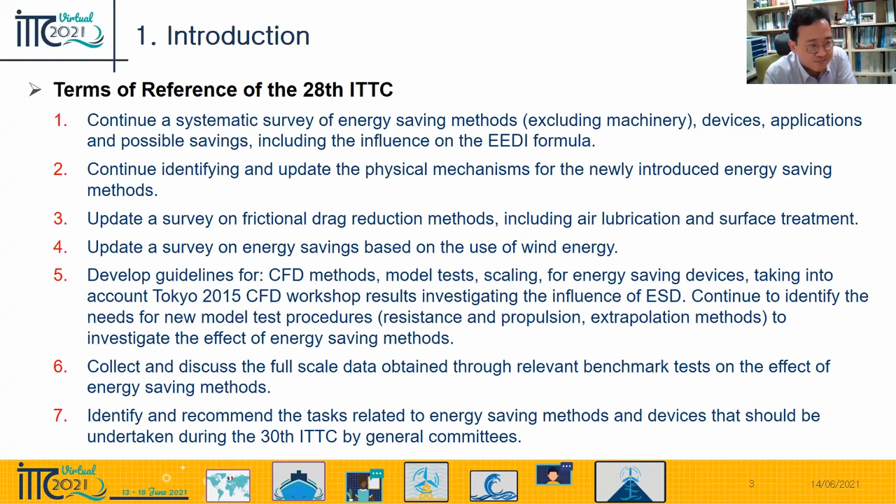Let me move on to chapter 2 regarding the survey of energy saving methods. In this shortened presentation, I'd like to make general remarks by showing the category of ESMs listed on the right. This category was established in the previous term and remains essentially unchanged. The primary category is about the principle, meaning where the energy saving comes from. There are 4 primary categories: direct reduction, reducing propulsive losses, use of renewable energy, and operation, shown in the next slides. Each primary category is subdivided into specific mechanisms for how the energy saving principle is achieved. During the present term, the committee searched for new mechanisms, so a couple of modifications have been made for the gate rudder and ducted CRP.

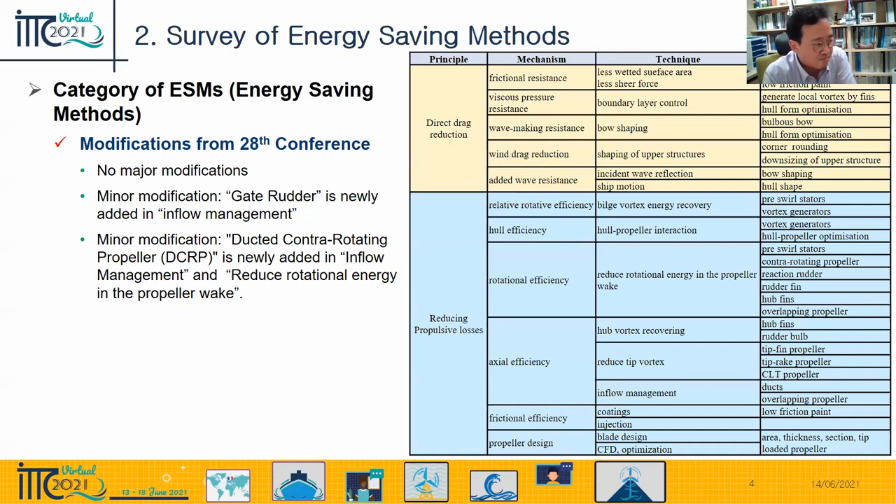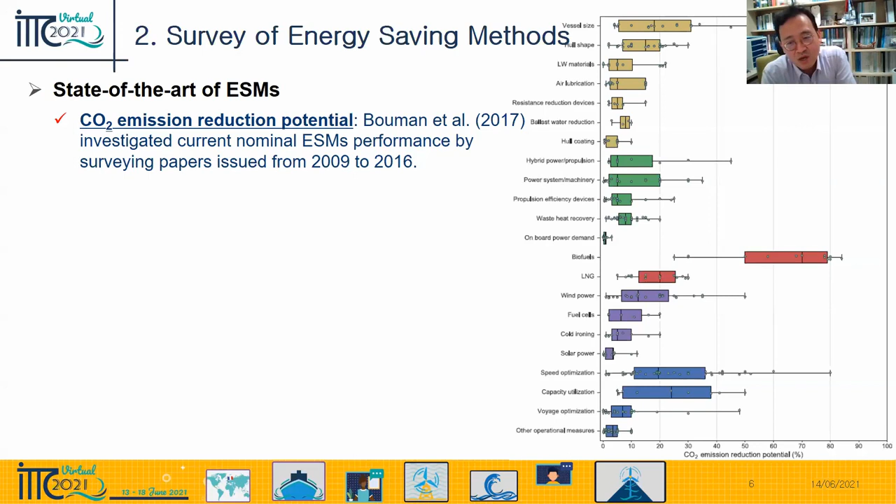This is the continued part for the category of energy saving methods, and another general summary for the energy saving methods. This figure was taken from Bouman et al. in 2017, showing the performance of energy saving methods in terms of carbon dioxide reduction potential, published from 2009 to 2016. In this paper, the ESMs are categorized into 5 groups: hull design, power and propulsive system, alternative fuels, alternative energy source, and operation. I believe this gives a good insight into the potential of the energy saving techniques.

Let's move on to chapter 3, titled Use of Wind Energy. According to Parker, there are several types of wind energy systems: flettner rotors, kites or spinnakers, soft sails, wing sails, and wind turbines. Smith et al. in 2016 stated that wind propulsion is most effective at slower speeds, for instance less than 16 knots, and for smaller ships with dead weights ranging from 3,000 to 10,000 tons. Those vessels account for 1/5 of global cargo ships.

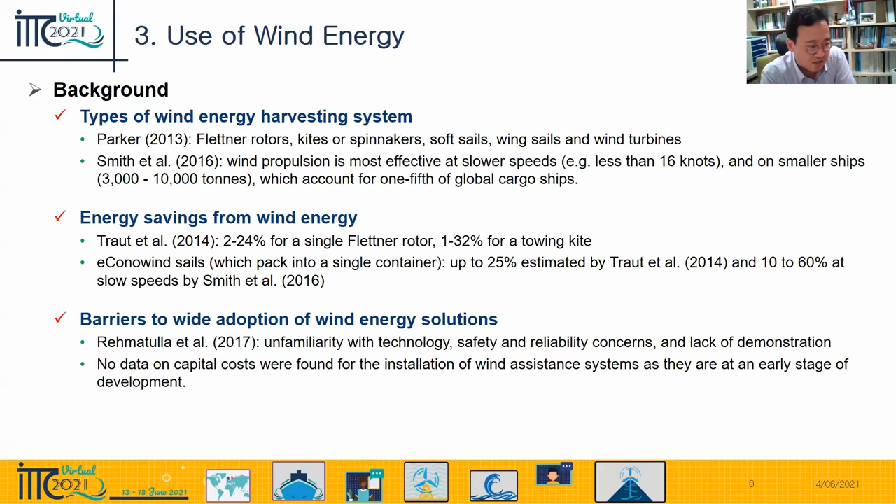The next slide lists representative types of wind energy systems and their energy saving effect. The first is the wing sail, investigated by Viola et al. in 2015, shown to reduce thrust by up to 10%. For the towing kite, the percentage of fuel saving was predicted at about 10% for Beaufort 5 scale, even higher, as much as 50%, at Beaufort 7 scale. For the flettner rotor, fuel savings ranging between 5.6% and 8.9% were reported by Pearson in 2014, Craft et al. in 2014, and Lu and Ringsberg in 2020.

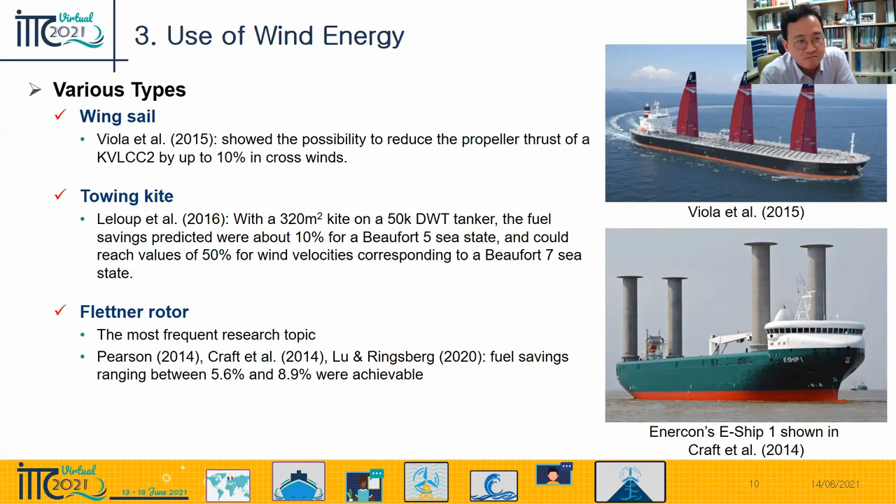Okay, the next chapter, the next task for chapter 4 is to identify the necessity for new guidelines for CFD, EFD, and scaling methods. The first topic is about the CFD methods for energy-saving devices.

The first topic is the Tokyo 2015 workshop on CFD and ship hydrodynamics, held at NMRI in Tokyo in 2015. The purpose of this workshop was the same as the preceding workshops: to assess the state-of-the-art of contemporary CFD codes for ship hydrodynamics. In the workshop, 3 ship hulls were selected, and a total of 17 test cases were specified by the organizers. 30 groups submitted their computed results for 1 or more cases.

Among the 3 ship hulls under consideration in the workshop, the Japan bulk carrier was associated with ESD, as shown in the lower right figure. The validation and CFD simulation of resistance and self-propulsion performance were carried out either with ESD or without ESD. The validation and verification results drew attention of the committee because they can shed some light on the overall level of accuracy of CFD simulation.

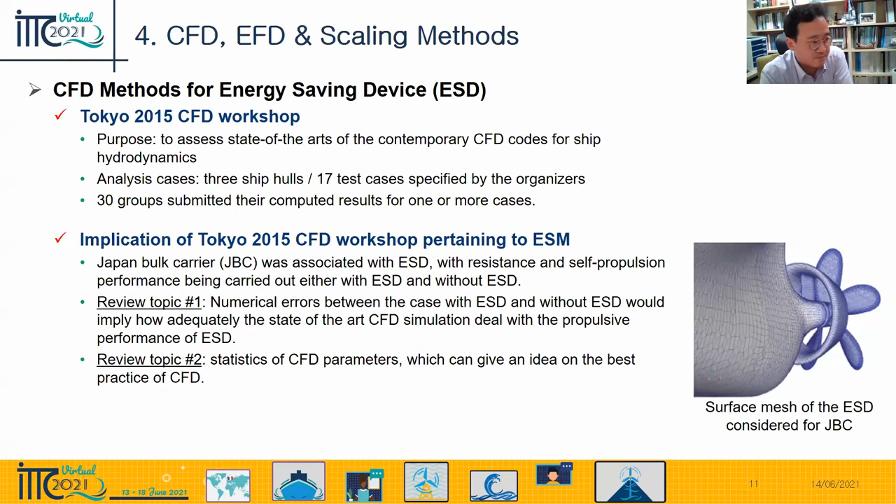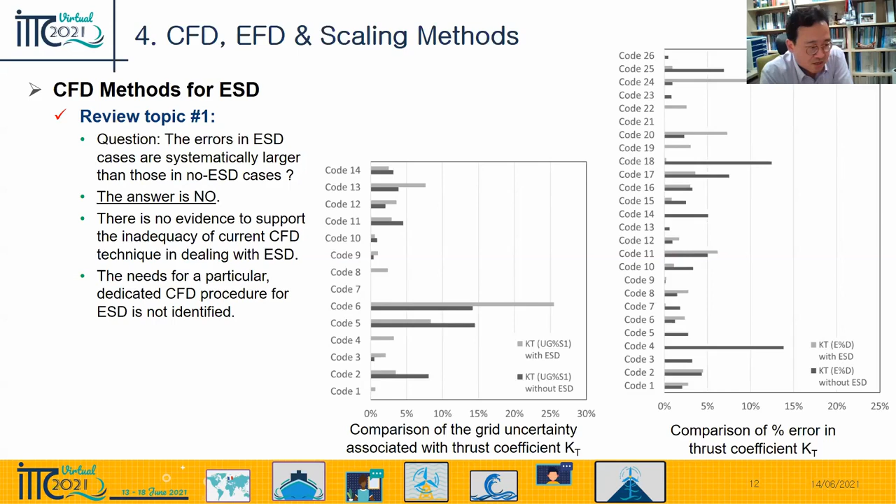This slide shows the comparison error in thrust coefficient and the grid uncertainty for thrust coefficient on the right. The major checkpoint here is to see whether the errors in ESD cases are systematically larger than those in no-ESD cases. As you can see in these two figures, there is no clear evidence that ESD cases lead to systematically larger error or uncertainty. So the answer is no, and there is no evidence to support the inadequacy of current CFD technique in dealing with ESD. Therefore, the need for a particular dedicated CFD procedure for ESD is not identified.

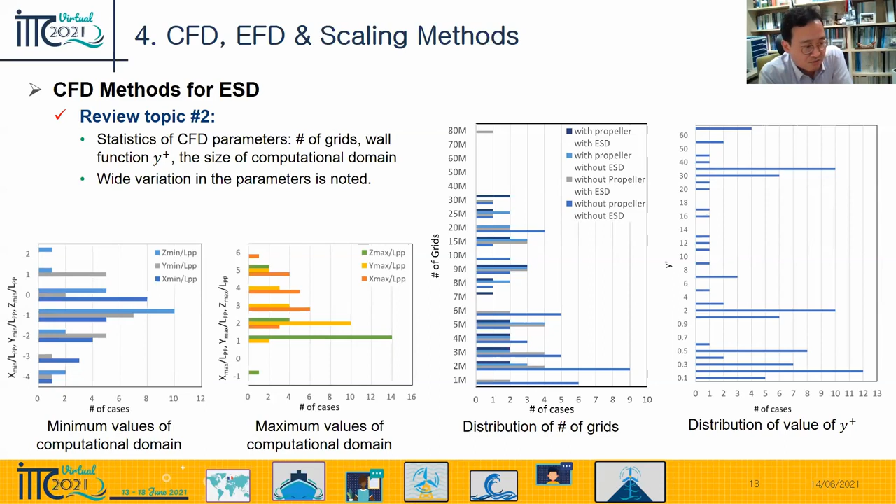The next topic related to CFD is to review a proposed guideline from PRADS 2016. Hino et al. in 2016 presented benchmark data for the validation of CFD simulation results for a Japan bulk carrier equipped with an energy-saving circular duct. In fact, this is exactly the same case we've been reviewing through the Tokyo 2015 workshop.

Aimed at identifying the necessity to set up a separate guideline dedicated to ESD simulation, the committee had it reviewed by multiple CFD experts in academia and industry. The guideline section in Hino et al. was compared with the following existing ITTC guidelines related to CFD.

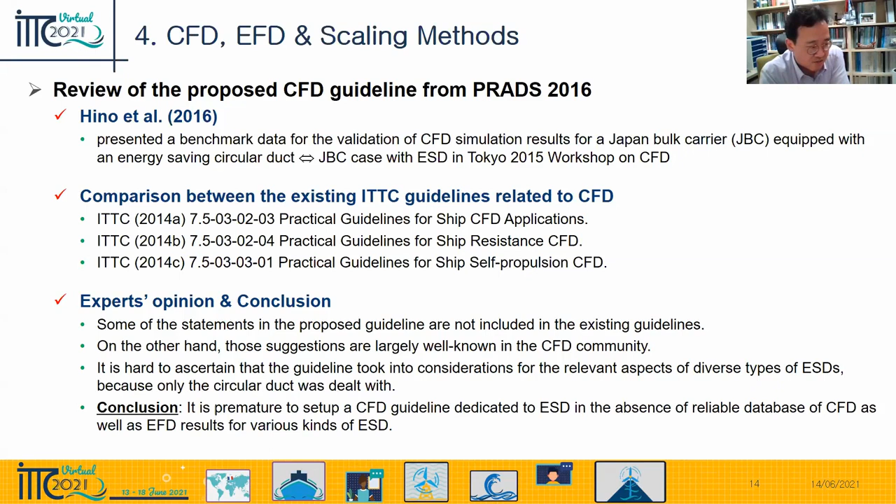It was found that some of the statements in the proposed guidelines are not included in the existing guidelines. On the other hand, it also can be said that those suggestions are largely well known in the CFD community. In addition, it is hard to ascertain that the guideline by Hino et al. in 2016 took into consideration the relevant aspects of diverse types of ESDs, because only the circular duct was dealt with. In consideration of these points, the committee concludes that it's premature to set up CFD guidelines dedicated to ESD in the absence of a reliable database of CFD as well as EFD results for various kinds of ESD.

Let me move on to the next topic in the experimental methods section. Skin friction reduction is one of the promising techniques of ship energy saving, and air lubrication has been implemented in several tens of vessels so far. In 2017, the previous term ITTC adopted a recommended guideline, resistance and propulsion test and performance prediction with skin frictional drag reduction techniques, as a guideline to extrapolate model test results to full-scale performance prediction.

However, the model test procedure for air lubrication in real practice has not been standardized yet, which may cause significant deviation in the model test results among model test organizations. So the committee was asked by the advisory committee to give a more detailed description of model test procedure on the air lubrication techniques, such as test conditions. The committee carried out a survey to investigate the current status of model test practices involved with air lubrication among organizations.

A 12-item questionnaire was distributed and 11 organizations replied. The following summarizes the replies. Here we summarize the major questions in this presentation, so please refer to the final report for full questions.

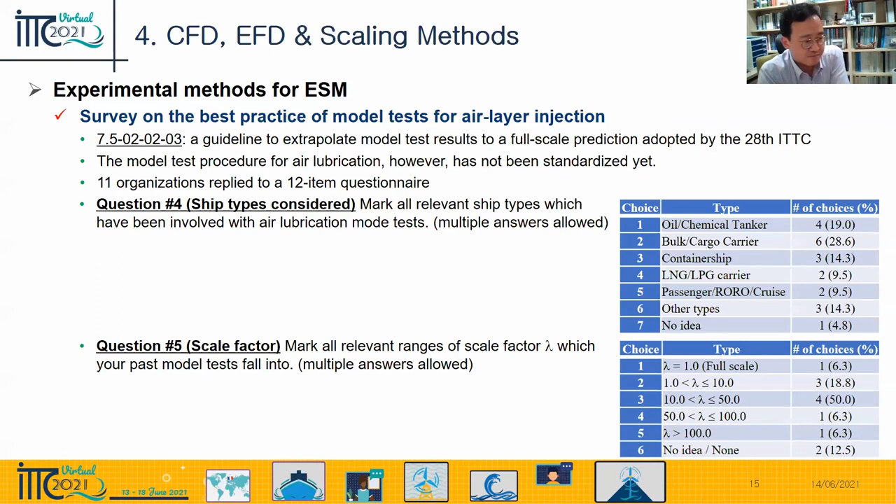The next item was injection pressure. In most cases, number 3 was selected, which means pressure was set at the hydrostatic pressure in model scale. Also, arbitrary pressure and no idea were also indicated.

For question number 8, choice number 2 was mainly selected. Injection flow rate in the model scale was usually controlled to give the same film thickness as in the full scale.

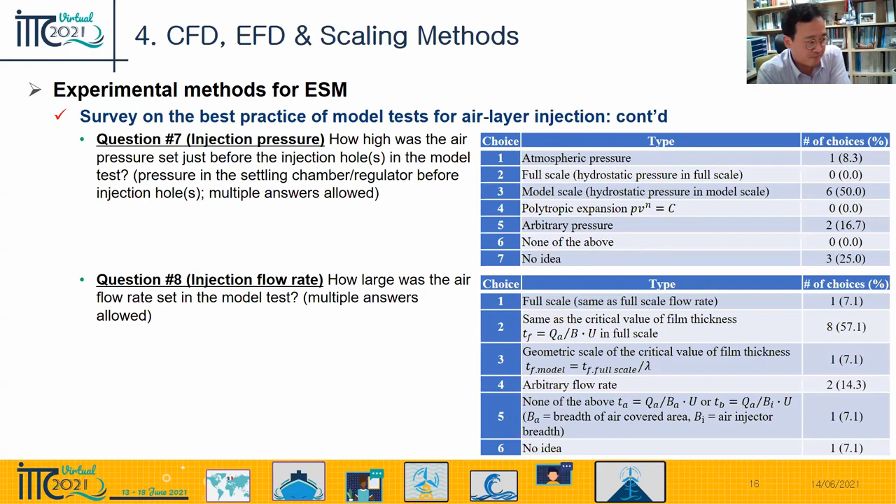For question number 9, the choices varied between no extrapolation, ITTC-78, and own guideline. It's notable that the newly adopted guideline has not been selected so far. This again proves the absence of a standard procedure related to the air lubrication model test.

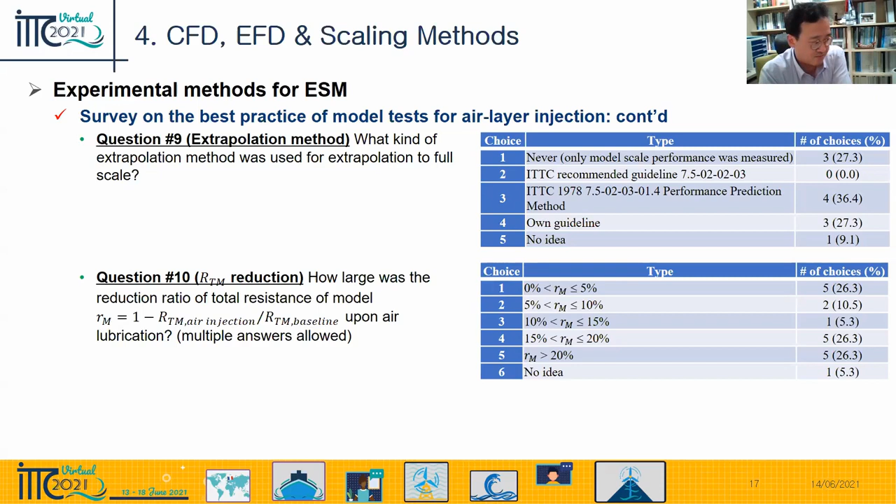Okay, the next chapter is about the recommended guideline from the committee. It is titled a scaling method for ship wake fraction with pre-swirl devices. The purpose of this guideline is to complement the ITTC-78 procedure for the prediction of delivered power and rate of revolutions for single and twin screw ships with either pre-swirl stator or pre-swirl duct installed.

Let me begin with explaining the wake scaling issue of ITTC 1978 related to pre-swirl devices. Pre-swirl devices generate a counter-swirl flow to save rotational energy from the propeller. For the prediction of powering performance, the ITTC-78 method adopts the thrust identity method to find out the effective mean wake fraction. This is effective in the situation like figure 30A.

The difficulty in scaling arises from the point that the pre-swirl device makes not only a counter-swirl, but also axial flow retardation. It is therefore necessary to decompose the axial and tangential components separately.

As shown in figure 30B, the presence of the pre-swirl device causes the relative velocity to the propeller blade to change as UR prime, with increased angle of attack, alpha plus delta alpha, thereby increasing thrust. If the scaling is applied to the total amount of model wake based on the thrust identity in ITTC-78,

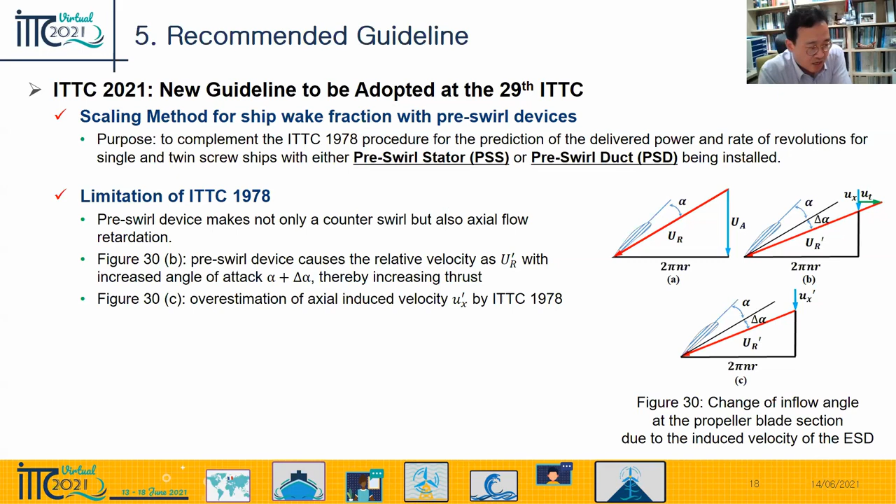This inadequacy of the 78 scaling led to an attempt to propose a new scaling in 1999. That approach, generally called ITTC 1999, was based on the report of the Specialist Committee on Unconventional Propulsors. Among two approaches, method B, where the stator is considered as a part of the hull, is now commonly referred to as ITTC 99.

The major difference compared with the 78 method formulation is the term W sub ms minus W sub mo. Here, the stator action was considered to be mainly of a potential nature, because the main effect of the stator is to increase the angle of attack of the propeller blade. Therefore, the difference in wakes with and without the stator is directly transferred to full scale.

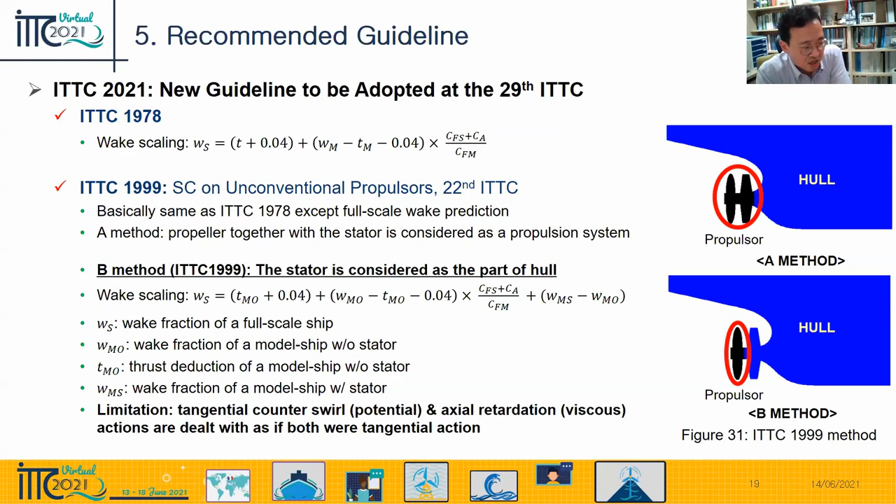Well, even though this might be more reasonable than ITTC-78, it cannot account for the viscous nature of axial retardation. So there comes a new guideline.

With a view to improve both ITTC-78 and ITTC-99, there has been a series of researches in which axial wake and tangential wake are separately treated according to ship type and device type. For instance, pre-swirl duct is adopted for fuller and slower ships like tankers, while pre-swirl stator is employed mainly for slender, faster ships like container carriers.

This is a compromise between the 78 and 99 methods, in that the axial velocity component and tangential velocity component are scaled separately. The axial wake, being of viscous nature, is scaled following the 78 method. On the contrary, the tangential wake is scaled following the assumption of ITTC-99.

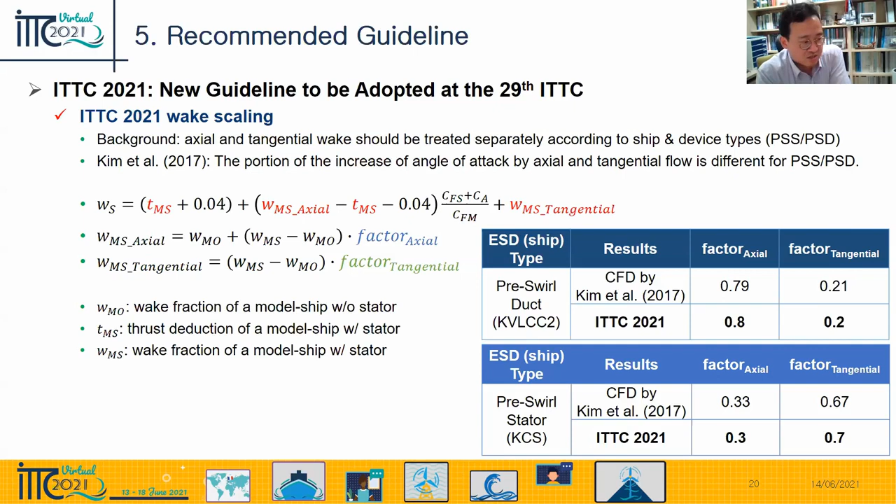Okay, I'm considering I'm behind schedule. Let me briefly mention the full scale data.

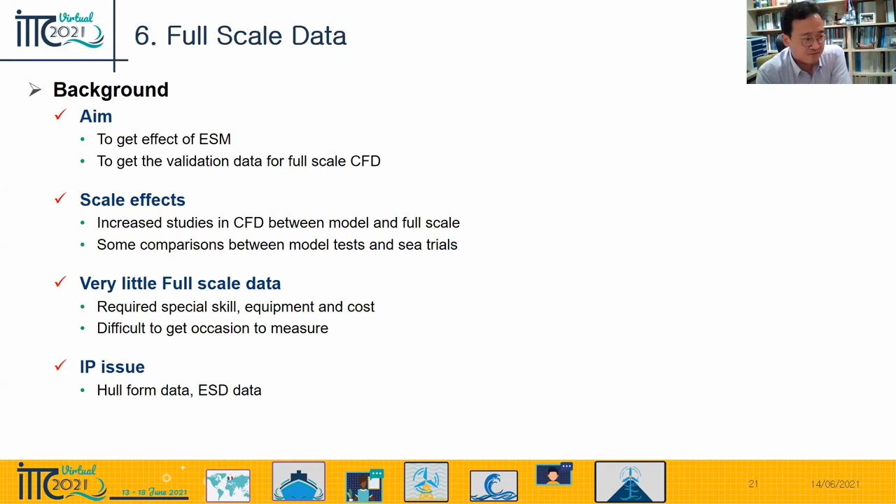The importance of full scale data for proper assessment of ESD cannot be overemphasized, but full scale data is very rare, so we always need relevant full scale test campaigns for energy saving methods.

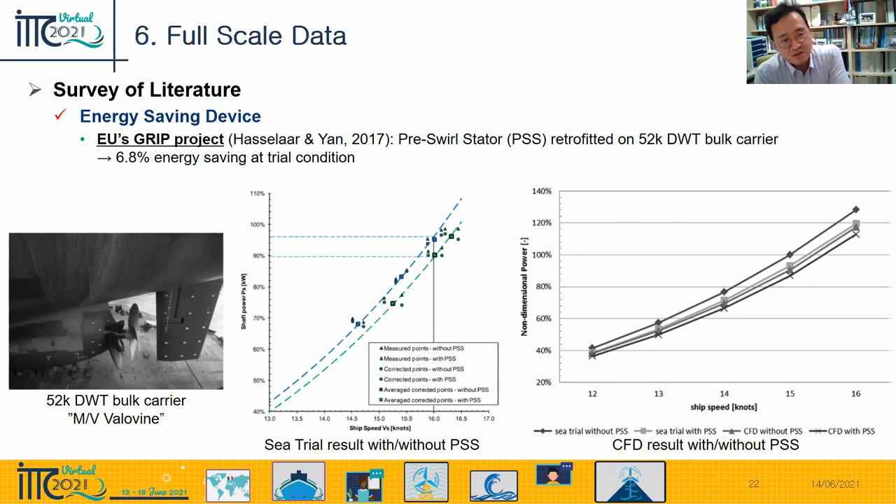The first category is energy saving devices. The most notable literature is Hasselaar and Yan, which is part of the EU's GRIP project. For a 52K bulk carrier, about 6.8% energy saving at trial condition was reported.

The next topic is direct reduction by air lubrication and low frictional coating. For air lubrication, De Freitas et al. in 2019 introduced full scale data on an air lubricated 40K chemical tanker, showing about 5% energy saving on average.

They stated that the ISO 19030 standard and basis of data filtering is currently the only viable means of executing performance analysis of the ESD under consideration.

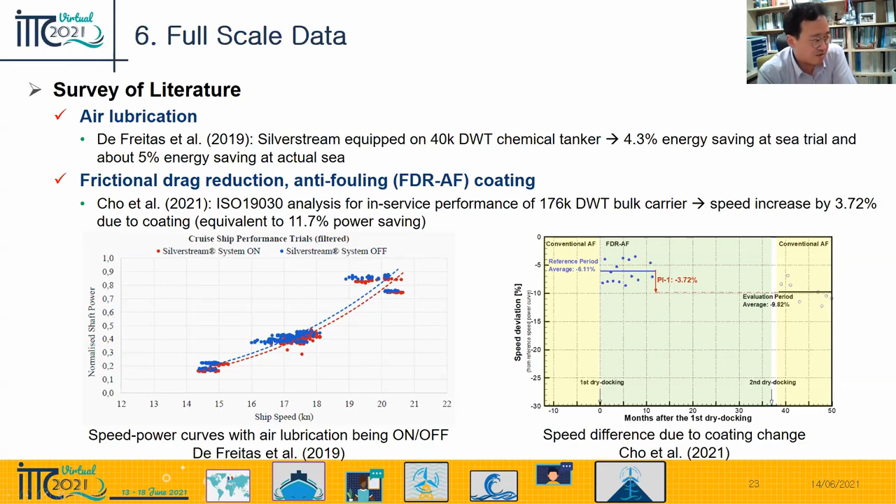The second topic: Cho et al. in 2021 carried out the evaluation of the performance of frictional drag reducing AF coating based on the ISO 19030 standard. Notably, they isolated the effect of the drag reducing coating by comparing two identical freshly coated vessel conditions just after dry-docking, with only the coating being changed. They found the coating led to a speed increase of 3.7%, approximately equivalent to a power saving of 11.7%.

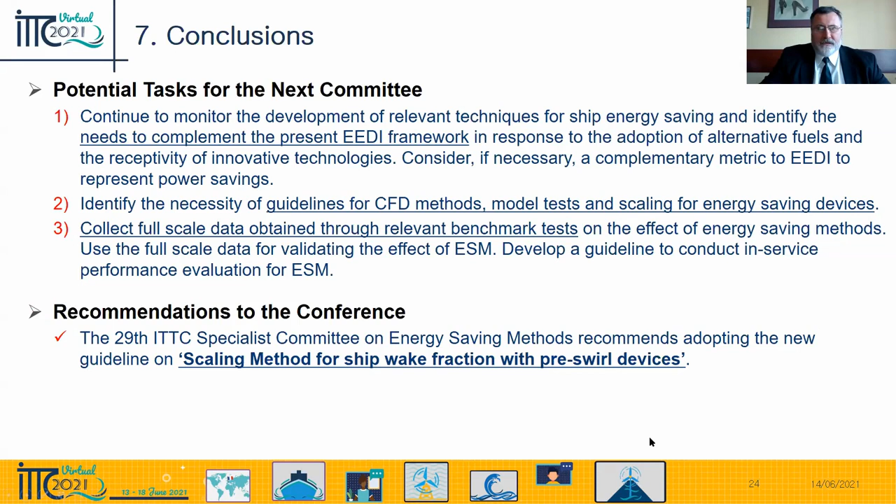Thank you very much for a very interesting presentation. So far we have got a question from Didier Fréchou. The question is: could some energy saving devices have an effect to delay cavitation inception? If yes, would it be a minor effect or not?

Well, the effect of energy saving methods on cavitation inception has not been a quite active topic of review for our committee. Perhaps it is a concern that maybe air lubrication might promote cavitation inception, but personally I don't think that's the case. For other types of energy saving devices like the pre-swirl stator, maybe other committees, like performance of ships in service, or combined EFD and CFD, or maybe the resistance and propulsion committee, might have relevant literature which can shed some light on that matter.

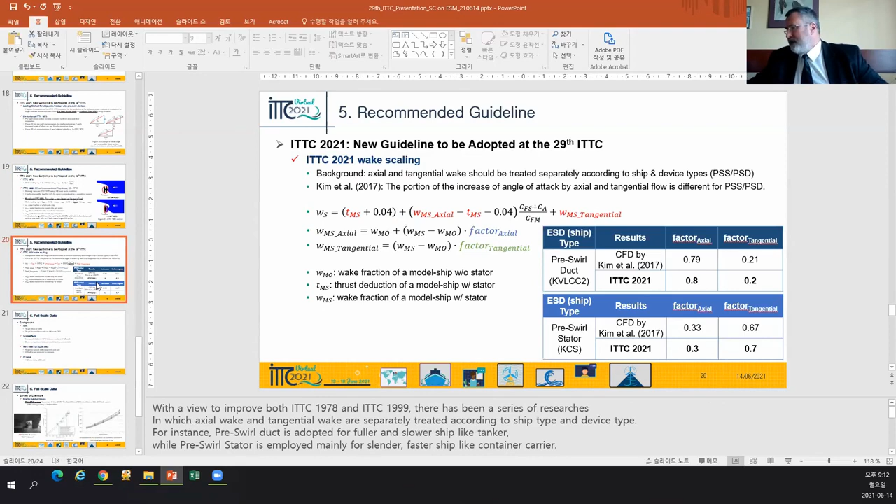If left side is PSS, the right side is PSD, how to correlate? Which slide do you mean? Left side, right side? I don't know which is left or which is right. Okay, so maybe Jin Bao will become more specific. In the meantime, I have a different question.

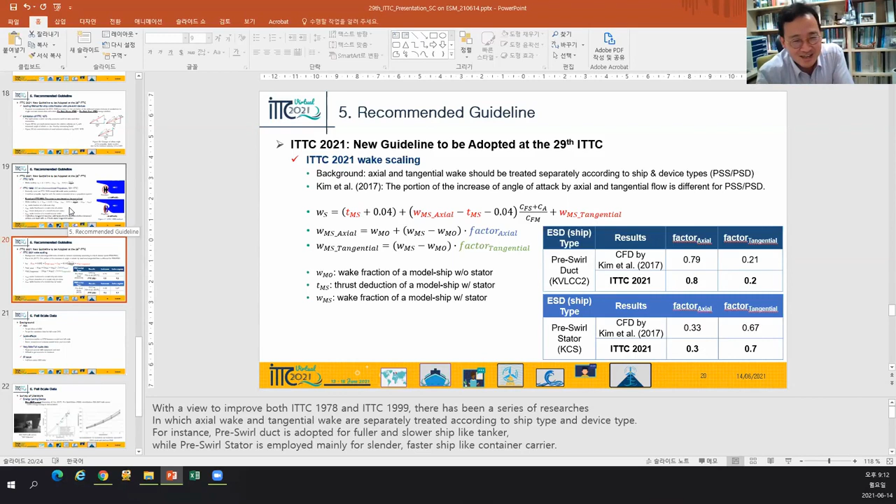Do you have any evidence, or have you met any evidence of energy saving devices that failed, that instead of giving energy saving, provided troubles? You mean structural failure or performance failure? Performance failure. Okay.

Well, there has been some literature pointing out the problem of differences in performance according to different drafts. Usually energy saving devices are designed under the design draft. But I remember some literature pointing out that sometimes the energy saving device didn't work properly - the energy saving efficiency became negative for some other draft. So yes, my answer is yes, and that's usually associated with the different flow field associated with different draft, I think.

Was this effect predicted by model testing or not? There were... well, usually model tests didn't cover all the drafts. Usually design load draft performance was mainly tested and reported or published, but later the speed trial revealed that in other drafts the effect was usually far smaller than the so-called optimal draft reported.